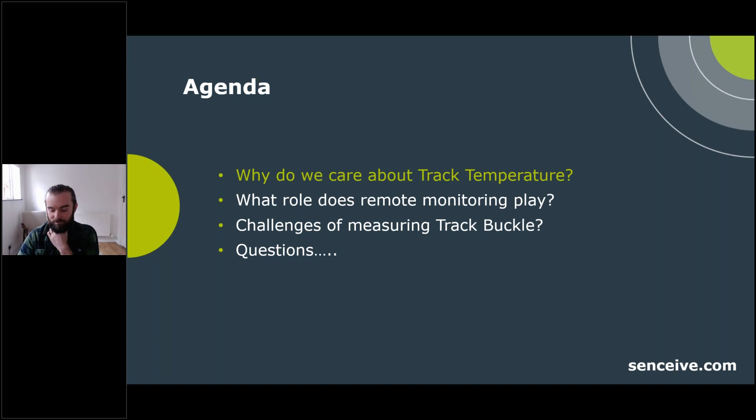So why do we care about track temperature? Generally, material, when it heats up, it expands, and a big lump of rail is no exception. And even in the most temperate of climates, there's still a swing of temperature between night and day that has an impact on the linear length of a rail. Like in many structures, we put expansion gaps or joints in place to allow the rail to move in this linear fashion. And this was the normal way of doing things. We called this jointed track.

And this is where you have bolt holes at the end of the length of track. You put a plate either side, and you effectively just bolt the two ends of the railway together. However, if you do start to see some decent swings in temperature, you can start to see tens of mil of movement, and the bolt holes start to degrade, and ultimately you start to see a failure, leaving the track unsupported.

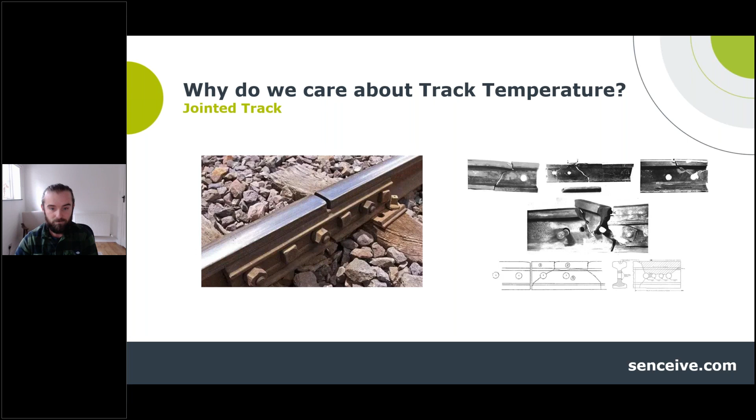So a big move was to CWR, which is continuously welded rail. Especially here in the UK, we moved to replace a lot of jointed track with CWR during the 70s and the 80s. And effectively, continuous welded rail comprises stitching many miles of rail together, fastening into the sleepers. Through these fasteners, we hold them into place. We apply a tensile force to them in order to keep it in place and keep it nice and rigid. And this has lots of benefits. It's stronger, it's smoother, and allows you to run faster trains over it.

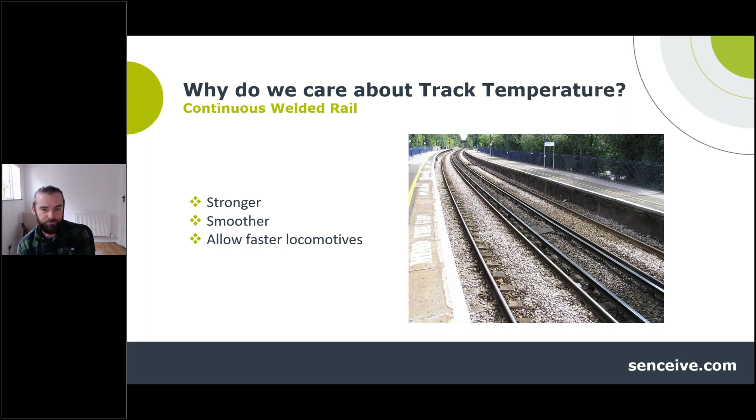However, with CWR comes another headache. When the track expands or contracts beyond its compressive range, you start to see some more issues. The track sits in a tensile stress that actually makes it stronger and allows the rail to hold its shape better. By stitching it together and applying that tension through the rail, we're improving the rigidity of the rail.

There's an example in a paper written a few years back about a piece of paper. If you pull a piece of paper apart, it becomes a lot stronger. If you start to push it together, you start to see the paper fold, and that's where the forces have got nowhere to go and they start to act out. So we don't really stress the rails. In fact, the opposite: we create a stress-free environment where tensioning holds the rail in place, and the rail can act fairly comfortably within these parameters.

However, when we exceed these levels and we move into a compressive stress, that compressive stress means there's nowhere for these increased forces to go, and that's where we start to see issues, and they manifest as buckles and kinks. It's important also to point out these are not unique to CWR. We still get these in jointed track as well, regardless of the fact that we have expansion gaps intended to take that expansion, but generally we see it to a lesser degree.

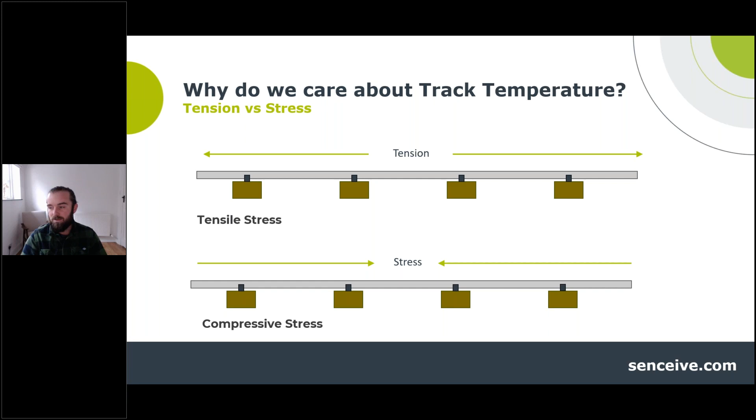And obviously pretty obvious, but the result of track exceeding its stress-free level is usually a buckle or a kink. These can appear in different wavelengths, different amplitudes, or locations within a high-risk area. It's where these compressive stresses become too much for a track to hold. It's that release that we see, and that's what we term as the buckle. And this can be with sleepers or ties, or even shear away from the sleepers or ties. And there's lots of lovely examples there taken straight out of Google Images.

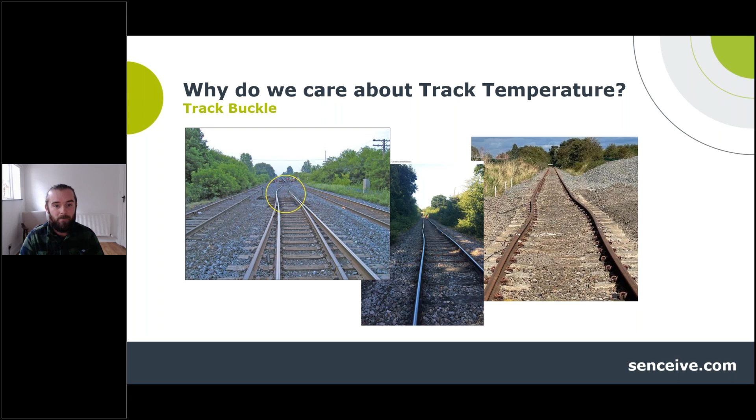So there's lots of contributing factors that can assist in a negative way of track buckle, and they need to be added into the equation, and they're mainly around the track bed and the rigidity of the track bed. Things that need to be considered, like the ballast shoulder. This adds an extra weight and an extra structure to the sleeper and the track, allowing for a more stable condition. Track maintenance: has the track been tamped recently, or are there any works being carried out around it that might weaken the track? Is the track area near some points or some turnouts or some switches? By definition, these are supposed to move, and therefore often weak points within a track area.

What is the rail actually installed on? Is it concrete ties, timber ties, timber sleepers, or track slab? They all offer different levels of stability and different levels of support. The track slab is by far the most rigid, but to be honest, it's equally the most expensive.

What are the train speeds that you're running over the area? The faster the trains, the more force you're putting through the rail, and potentially disrupting the ballast underneath, creating weaknesses. And if there is a compression within the rail, it will exploit that weakness and start to develop a kink. As we've all figured out, all of these elements focus on the stability of the track bed in order to take that compressive stress if it falls out of the range of what it's been set to.

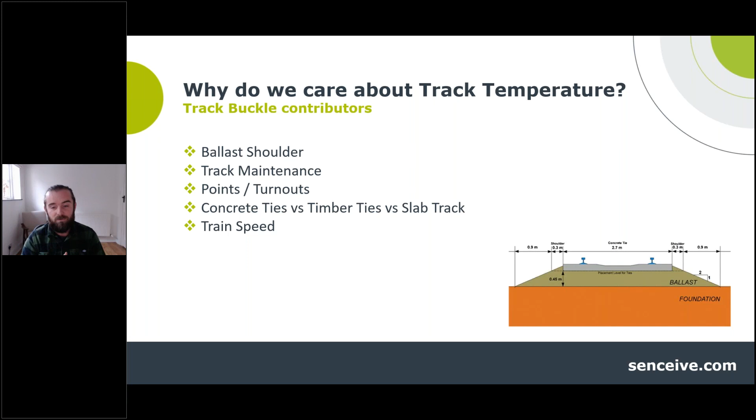So what causes the increased stress? And obviously the name of this webinar gives it away, but it is an increase in temperature, as I said at the start. The track is set to a range that is suitable to that climate. In the UK, we have an average summer maximum of 27 degrees Celsius, believe it or not. Doesn't feel like it at the moment. And we set something in the UK called critical rail temperature, which is the maximum temperature before a rail is considered stressed. This also has an allowance for the track conditions that we mentioned in the previous slide.

And not just in the UK, but in lots of rail authorities, there's a fairly developed matrix of managing what that critical rail temperature might be, and considerations that need to be taken to get the most accurate number. For example, a well-maintained track might have a critical rail temperature of 59 degrees Celsius. You might say that's the point at which the rail is going to go above its tensile stress and into a compressive stress, and we're in the danger zone.

But if the track is on timber sleepers, or it's near some sets of points, or there's some adjacent construction going on, that will rapidly start to decrease, and that number might come near a summer maximum. We also need to consider the fact that air temperature is not the same as rail temperature, and there can be as much as 20 degrees difference.

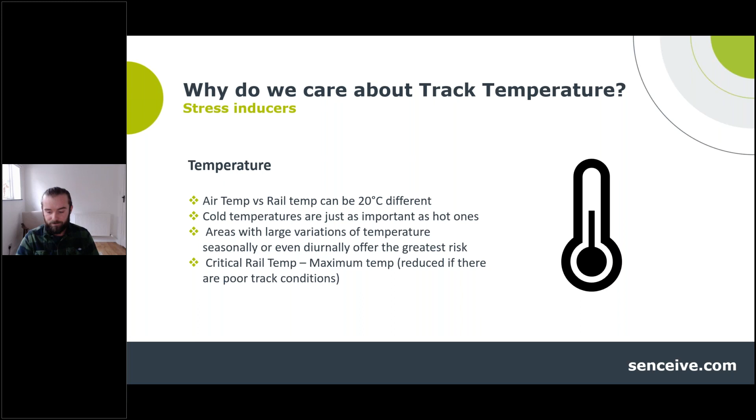So, there are some mitigations that we can try to protect the track from rising temperatures. You know, setting the tensile stresses and the track design as a whole is a real balancing act. The obvious question is why don't we just increase the maximum temperature that a rail can suffer before it moves into compression?

But let's not forget that we can't increase the range, we just move the range up and down the scale. So if we increase the upper end of that, then we also increase the lower end of that. And colder conditions come with their own problems. If there's too much tension, you start to get cracks. So if we set that too high, we have more issues in the winter. If we set it too low, we have more buckles in the summer. There's a real balancing that the track designers have to do.

The other obvious point that is made is why don't we re-stress the rail seasonally? Obviously, we have different conditions in the winter time through to the summer. And this is actually done in some countries because the swing is so great, but also usually because they have different uses of their rail, potentially different traffic levels.

But in most countries, most European countries as well, it's just not practical. You have thousands of miles of track that need to have a level of downtime, have to be resourced, and we have to go out and do it roughly in the same season each year, and it carries a huge cost. And as we said, it's not just a simple number that you set; track condition and maintenance need to be taken into account. So suddenly you're having to apply different track designs to different areas. Doing that twice a year becomes a major undertaking, both technically and commercially.

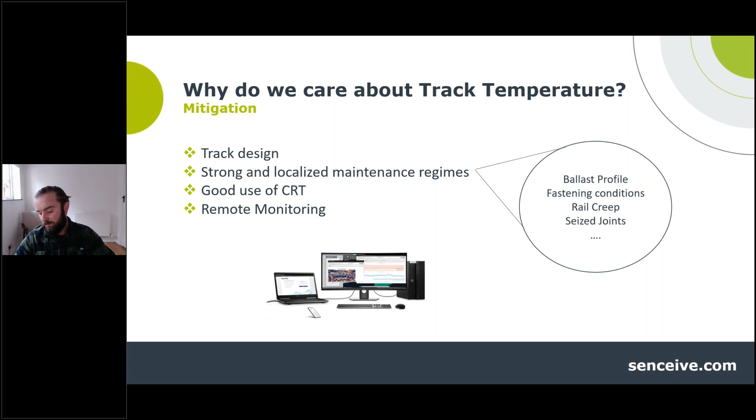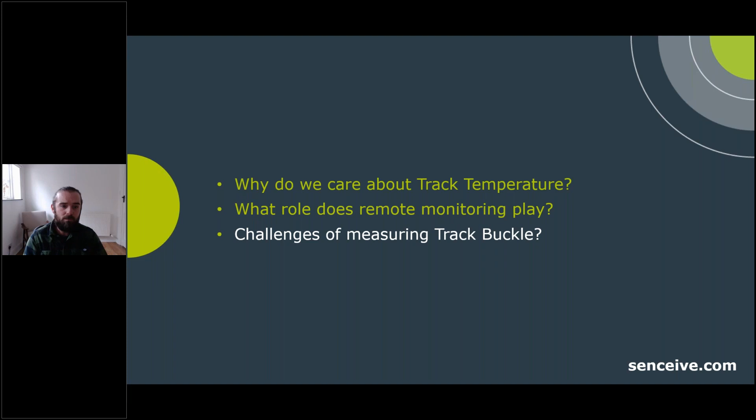Which leads me on nicely to the next part, about the role monitoring can play in this particular track defect. When specifically looking at buckles and kinks, which are caused by the increase in stress, which in turn is caused by the increased temperature, if the potential critical rail temperature is different for different climates, localized within those climates and local to the track conditions and surrounding work, then the first port of call is to understand the temperature of the rail itself.

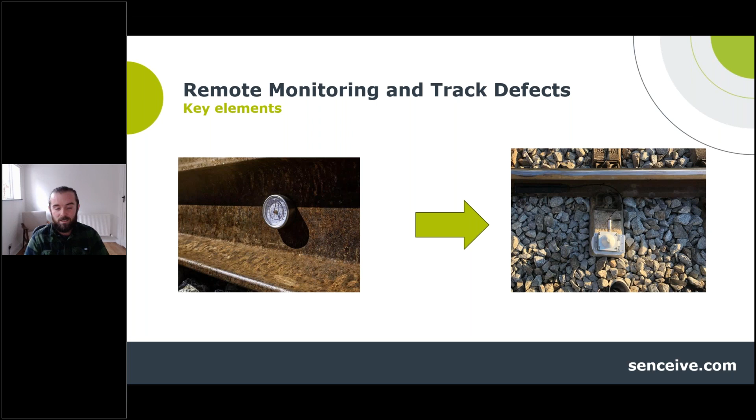Forecasting plays a vital role in any rail authority in predicting when they're at risk, especially over the summer months in the northern or southern hemisphere. But confirmation of that track temperature needs to be done to initiate the next steps, to confirm that the rail is actually at that temperature. On the left-hand side is a very manual way of doing it: you put actual thermometers onto the rail. And on the right-hand side is Senceive's version of remote monitoring, where we put a sensor on the web of the rail that talks to a wireless node.

To put that sensor into the context of our ecosystem, the sensor is located on the web of the rail, taking the measurement of the temperature. This can be every minute to every hour, depending on what you set it to. It talks wirelessly to an autonomously powered gateway, which then sends its data via cellular network to our cloud base, and it's then displayed on the front-end platform where it can be reviewed, interpreted, or alarmed. It can also be simultaneously integrated with another platform if required.

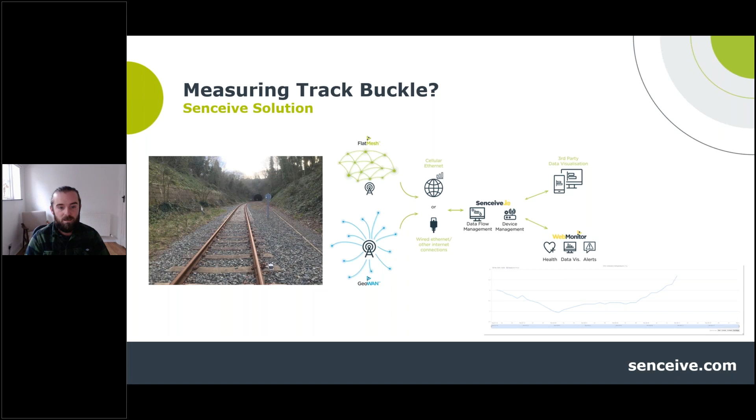It's a bit of a small picture, but you see on the left-hand side you've got the node at track level, taking the temperature samples. You've also got the gateway in the distance that's picking up data from that node and sending it to the back end. And on the bottom right-hand side, you've got an example of a graph showing the variation in temperature of the node that we've got on the test site.

Measuring the temperature is only half the challenge. As I said, it's certainly a real positive impact on confirming a rail temperature versus a forecast or ambient temperature. It allows the track engineer to compare against the CRT that they've set for a particular track. But it's not actually giving any information on whether there's been a buckle or a kink.

You know, we set the CRT based on a lot of criteria, and in reality, some of those criteria are best estimates or best practice. And understanding that relationship carries a lot of value, don't get me wrong, and there are buckles that are directly related to temperature, but actually understanding whether a buckle has occurred post that exceedance is the obvious next step.

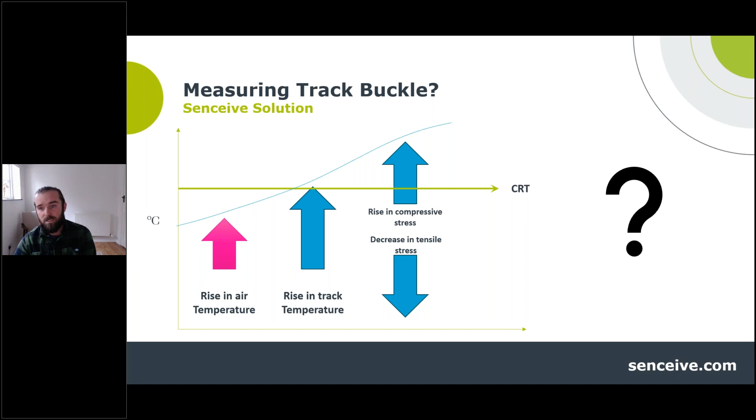At the moment, quite a lot of reactions from rail authorities worldwide is, okay, we know that the air temperature is likely to cause higher rail temperatures. Right now, we've confirmed that the rail temperature has now exceeded the design factor. They will then, if they can, have to send a watchman out to actually look for buckles within the track. And the next step of our mission is to actually try and capture those buckles through remote monitoring as well.

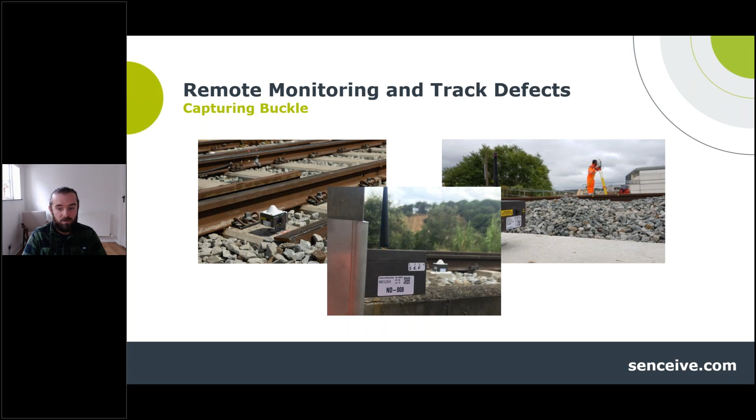So we want to understand whether those elevated temperatures above that critical rail temperature have in fact created that buckle. And to do this, we place what we call an optical displacement sensor. We place it off track on a stable position, and we shoot directly onto the web of the rail. And this provides a millimeter output, and again takes readings anywhere from 1 minute to 1 hour. And the sensor can take those static readings or be triggered by the sensors within the network, such as a temperature sensor.

So what we aim to do is provide a complete picture. We don't have to go through everything, but we go through the precursor of providing a weather station should you want that, something similar to pick up ambient temperature. We pick up the cause, which is the rising temperature on the track, by placing a sensor on track. We place an ODS to pick up the buckle, which is installed at 90 degrees to the track, pointing at the web of the rail, picking up change in lateral slew.

So you can immediately say, right, we've got an elevated temperature on the rail, and now we've got millimeter movement perpendicular to the track, so we start to see that the track is moving. And then we've also got a camera that can validate the readings. And when we say validate the readings, I'll talk about this in a little bit more detail later on, but to also validate the conditions that are on site.

As we sort of mentioned in the previous slide, it's not just temperature that can contribute to the buckle occurring. It's the shoulder, it's surrounding works, it's other things as well. And the key element of this whole system is our wireless network and the intelligence that we can sit on top of it, which we call InfraGuard.

The system can tick along, taking hourly readings, providing nice trends and patterns during cooler conditions or overnight. So the temperature sensor is taking a reading, the ODS is also taking a reading and saying I'm sitting at 0 millimeter movement. And then as the temperature rises, the sensor will also ask the other sensors within its network, saying, actually, I'm starting to feel an increase in temperature. I think we should up our sampling rate automatically and go suddenly from half an hour to 10 minutes.

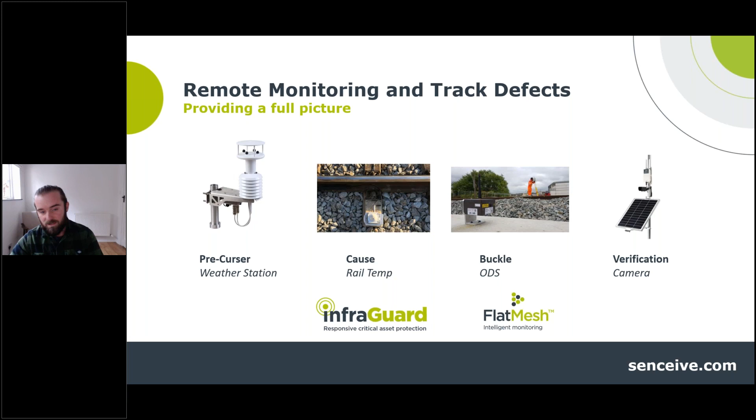And it means that if something was going to happen, the system will automatically adjust to what's going on and send that information to the back end, alerting via text and emails of what's going on. And the ODS used is a very simple distance measurement. It measures from that set point to the web of the rail. Its output is in a very simple millimeter format, so it's very easy for anyone to pick up and understand what's going on.

But this isn't something we just sort of come up with. It's been something we use globally. It's a way of picking up buckles and lateral slew. We work very closely with Network Rail here in the UK to hone and prove this system works.

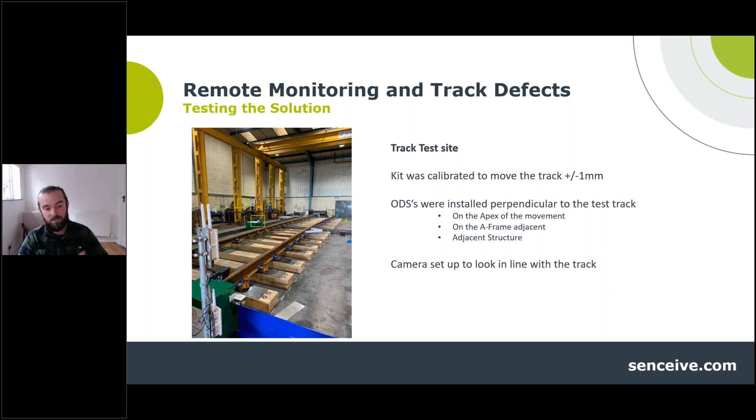And then what we did is we moved the rig to move the track laterally by 10 millimeter increments. Between each 10 millimeter movement, it would come back to 0. So it would go from 0 to 10, back to 0, 0 to 20, back to 0. And these are the results you can see, and they're extremely impressive.

The first 2 were within a millimeter each time of the movement. The A-frame, it's not out at all. It's just monitoring a different part of the track, so the amplitude is slightly less, but it's clearly showing 10 mil movement, 10 mil increment. So yeah, it proved that the system worked exceptionally well, and it's a very reliable way of measuring lateral slew.

The camera was triggered, took shots as the movement was happening. And yeah, I'm not going to pretend that the camera can pick up millimeter movement. We're there to validate. We've got to about 40, 50 mil, and you can start to see the bend in the track. But as I said, it's there to validate the surrounding environment and see if there's anything else that the track engineer might want to see to understand better the movement that the sensors and the temperature range are showing.

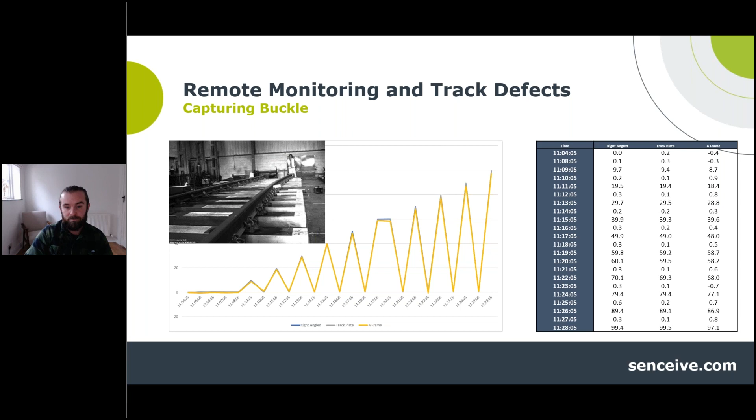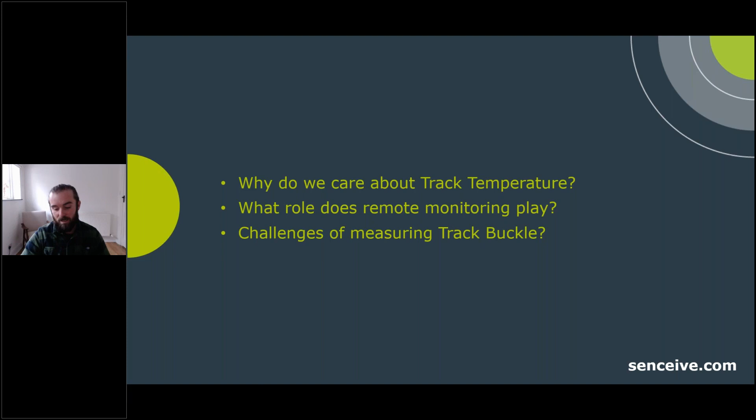So there's still a lot of unsolved challenges that we have. And do we think we have the complete system? No, I think there's still a lot of work to do. Buckles can happen over long wavelengths, and being able to understand the length and the size is a really useful tool. Equally, our current application measures a point along the rail, so assumes a level of understanding of where the buckle might happen. In reality, the buckle might happen over many meters, a section of track, and so you can install multiple sensors, but then it starts to become cost prohibitive potentially. So we've got some work to do on that and how we can improve that.

Amplitude: what kind of amplitude is expected, and therefore what's the critical level of movement that you want to be able to capture. Our camera doesn't aim to replace any particular part, but it can support watching. It has to look along the line of track movement. It can't look directly over the rail, but it can look along the cess. And we've done some testing to show that, up to about 40-50 mil, you start to see some buckle over the smaller wavelengths.

Different parts of the rail have different behaviours. Whether you're on a bend, whether you're on a straight, whether you're on points. Understanding those is different, and the setup and the application of the system is different. And so we need to adapt and develop our systems to capture those different environments. Bends are typically points where people are very nervous, because you've got a lot of stress on the outside rail. So we've got to understand how our system works in the same premise, but whether it can be developed further to allow better understanding.

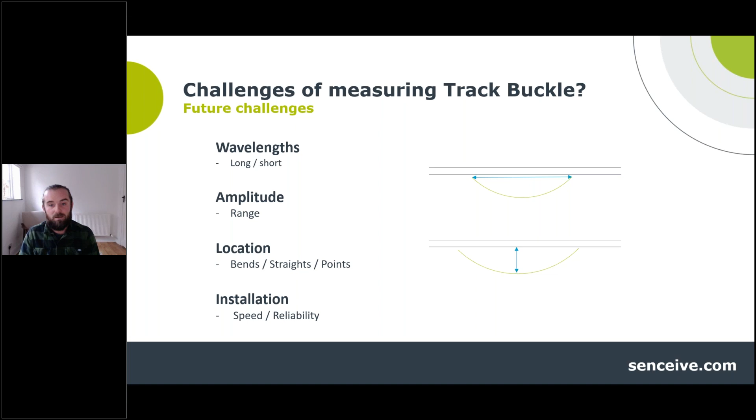And especially when you're doing activities in the summer, and you're potentially disturbing the track ballast or weakening the track, you're mandated to put some critical rail temperature monitoring onto the track, because as we spoke about previously in the webinar, that's where you're starting to see a decrease in critical rail temperature. So it might be at a higher level. Suddenly you start doing some piling work next to it, and actually the level might be 40 degrees, so you have to do the CRT next to it. So you need to put something on quickly and easily that's giving you an output that can measure that reliably straight away.

So we use the ODS as its installation output. Commissioning time is very simple and clear to the end user. But there are different sensor types that could potentially provide a more comprehensive understanding of that stress change. The obvious thought sort of goes to strain gauges, but understanding and interpreting the data is actually quite tricky. You have to fit quite a few on to actually make sure that you're getting a good average.

It's quite intrusive to install, and you need some background time to iron out things like trains that are moving past and other movements. So we're still sort of trying other ways of picking up that movement, but the ODS is a favourite within our client base because it outputs in that format.

And the camera, like I said, is currently used for just general verification of what's going on site, so that any changes in rail or the ballast and any mitigating info might be garnered from the imagery. As we said in earlier slides, there's lots of contributors, but we're also working towards pulling quantitative data from the camera, as well as using post-processing techniques, so we can actually start overlaying some of the images as well.

These are the two images I've just put on the screen here, from the same spot but 24 hours apart. We can start pulling some metrics off of those, and suddenly pick up a lot longer range in a very unobtrusive manner.

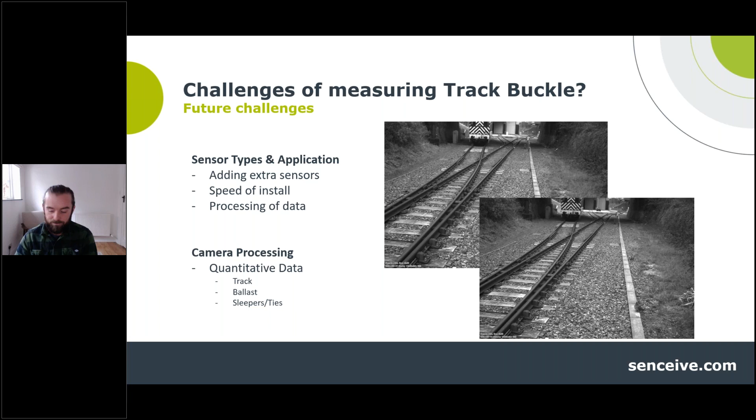Ultimately, we need to work very closely with lots of the different rail authorities around the world to help solve the growing issues within track engineering with climate change. I don't believe there's one uniform plug-and-play answer that meets all of the requirements at the moment in terms of output, in terms of cost, in terms of practicality, in terms of range, type of track, etc.

However, there is a growing improvement in the ability to measure buckle and measure buckle accurately. There's a growing desire to provide more information and detail on this. So at the very least, we can and do provide track buckle and lateral slew monitoring techniques right now for high-risk sites. We need to develop it further and develop some more techniques, but we're on the right path.